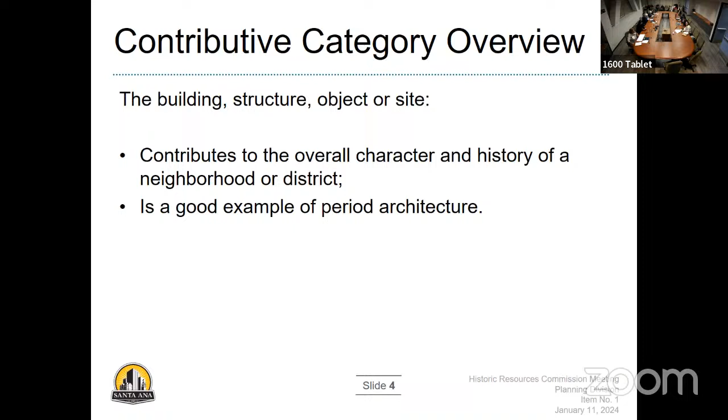And then again, as a refresher, I've included this slide that explains the contributive category overview. So in order to qualify for contributive category, a building, structure, object, or site must contribute to the overall character and history of a neighborhood or district, and or is a good example of period architecture.

And then lastly, staff recommends that the commission adopt a resolution to approve HRCA number 2023-20 and HRC 2023-06, and recommend that the city council authorize HPPA number 2023-12. And that concludes my presentation. Thank you.

Questions from the commission? Yes, Commissioner Christie. Can you hear me now? Am I too far? Not close enough? I'm a little bit closer. Is this okay?

You're okay. Am I okay now? Yes. Okay. Hi, Andrea. Great report. Go back to the pictures. I want to see the first one that you put.

Okay. If you notice on this, I want everyone on the commission to look at the property, look at the landscaping, look at the height of the landscaping. This house is on the corner of Lowell and 9th, 10th, right? On the corner. Okay, when we talk about view corridor, it is where no matter where you walk on the side of the property, going to the front, you can see the entire property, the structure of the historic home, and that none of the landscaping is prohibiting any view of that property from the view corridor.

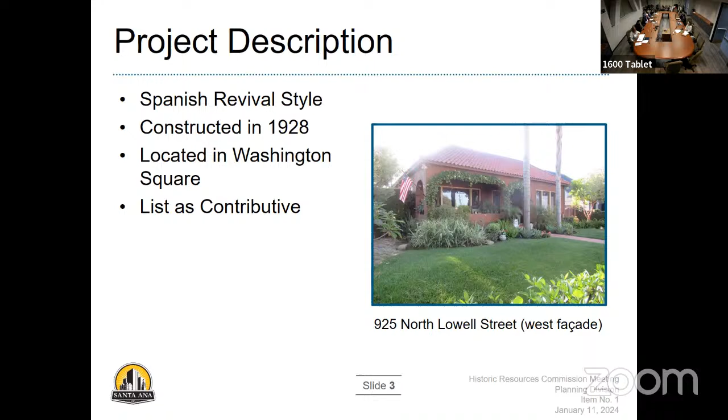In addition, we have an ordinance, and we'll cover that ordinance later on. But I want everyone to show the other pictures, please. As you can see, once again, you can see the full property and the distinguished features of them. So I want the commissioners to keep this vision in mind, and we will discuss further about the view corridor. Okay. Thank you.

Commissioner Christie, you're asking about a view that is not represented in one of these pictures.

Questions of staff, Commissioner Hardy? Yes, I'm curious. I have a question and a comment. Can the garage be seen from the street? Yes. How important is it to keep and maintain the clay tile coping and clay tile roof awning on the garage? The garage was listed as a character defining feature as part of the historic property.

It has been altered. The garage door is not original, and that's mentioned and is part of the Mills Act work plan. But any of the features that tie in with the main house should be preserved or restored, including the clay tile roof awning and coping. Okay, thank you.

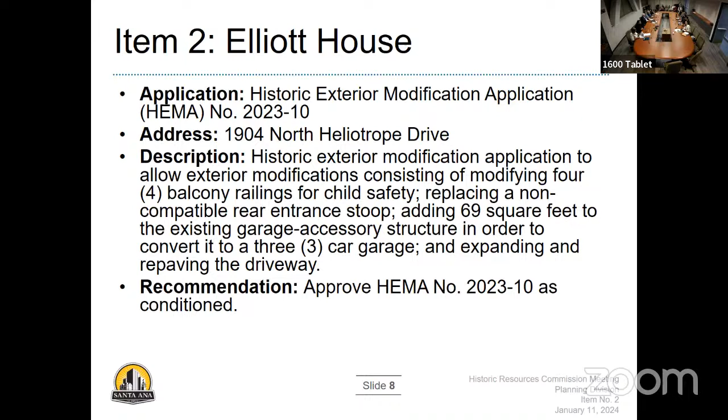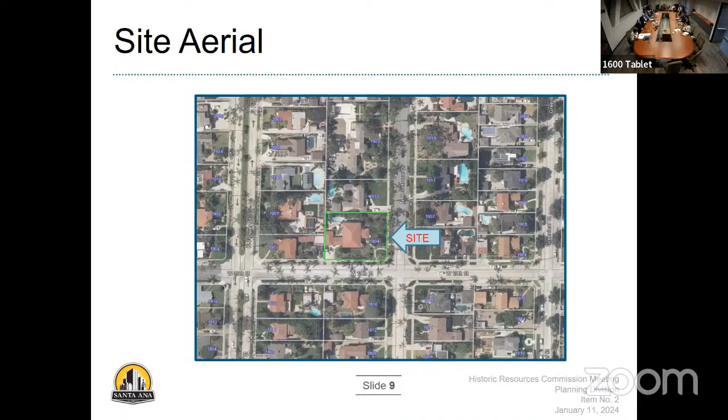The Elliott House was constructed in 1931, along with the detached garage, in the Italian Renaissance Revival style. It's currently listed as number 332 on the Santa Ana Register in 2003 at the landmark level, which is the highest level. And because it is in the Floral Park National Register Historic District, the district is automatically listed in the California Register of Historical Resources. Lastly, the property is a contributor to the Floral Park National Register Historic District.

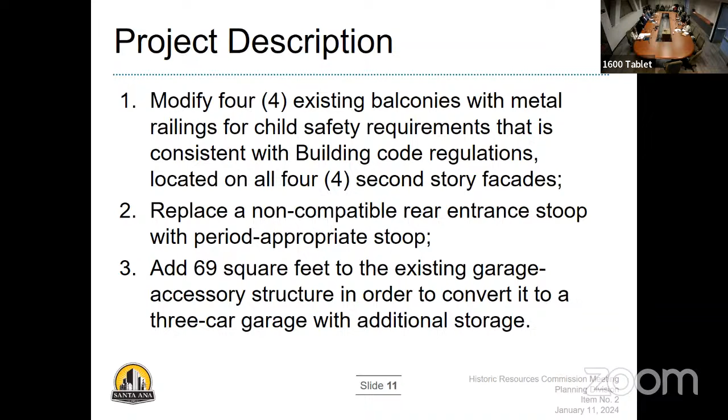The project description includes modifying 4 existing balconies with metal railings for child safety requirements that will be consistent with building code regulation. They're located on all 4 second-story facades. Also, replacing a non-compatible rear entrance stoop with a period appropriate stoop, and adding 69 square feet to the existing garage accessory structure in order to convert it into a 3-car garage with additional storage.

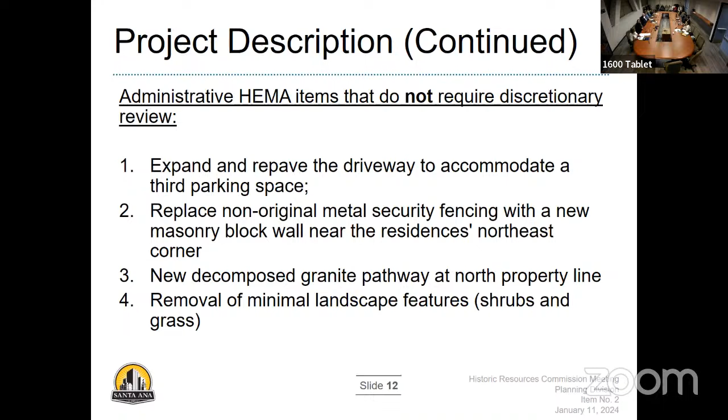Here's a list of the administrative HEMA items that do not require discretionary review, but we still list them so you know what is part of the project: they intend to expand and repave the driveway to accommodate the 3rd new parking space in the garage; replace the non-original metal security fencing with a new masonry block wall near the northeast corner of the property; add a new decomposed granite pathway at the north property line; and lastly, remove minimal landscape features, shrubs and grass in order to accommodate the driveway expansion and the pathway.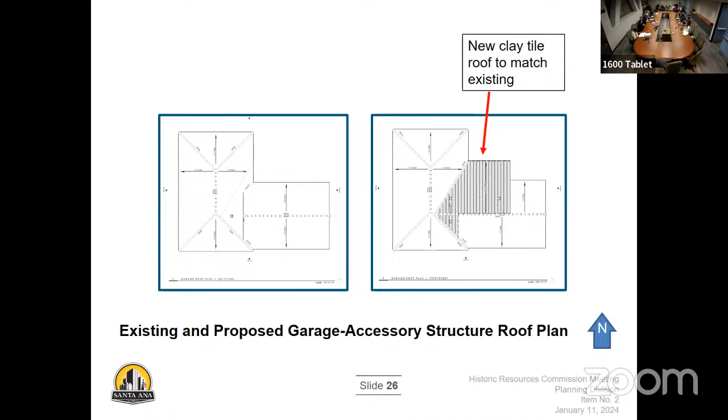So that's number one. Number two, I wanted a little bit more detail. I know one of the other major changes was related to the guardrails themselves. I think what matters with this particular kind of metal work is when you look at the width of the work, very much at the detailed level, I think we're kind of missing that. So I'm not sure, are there going to be any kind of adornments along the base, which are consistently there currently? The base has these small little... oh my gosh, I'm forgetting what they're called, like feet. Yeah, the little feet. But that's there currently.

So I guess I would just try to go ahead and match that or something similar, because if we're getting just the regular kind of rebar, a 1x1 metal tube that is fairly common today, that would be inappropriate to do. Unfortunately custom work probably isn't feasible at this particular moment in time. But if we're matching it to the historic original that we have a good example of, that's something I would take a look at with that proposed change.

And then thirdly, this is really more of a policy question for the board.

Is this a Mills Act property? Okay, so do we know how much the property is currently getting as a tax rate? We don't get that information disclosed.

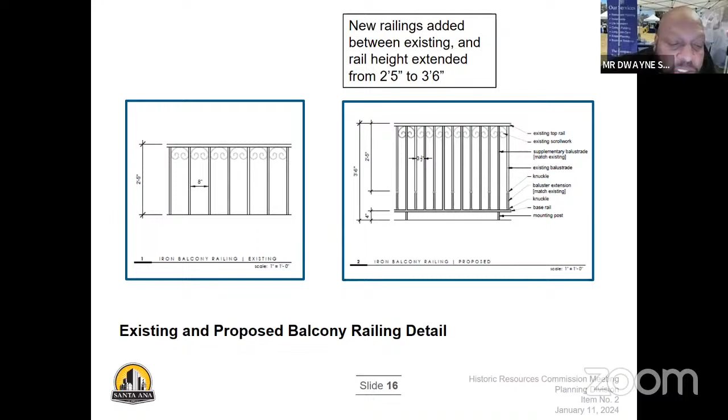And Commissioner Schiff, do you have any questions? No, all the other commissioners pretty much said all the concerns that I had, so I'm in agreement. Okay, I have a couple of questions.

Exterior balconies which are not being addressed. There is one that they are not modifying. It's made out of wood, the balustrades are wood, and it's decorative. It's not meant to be stood on. I see. And there's a door that opens to that balcony, and they're going to make it permanently fixed for safety. I see. So, okay, okay.

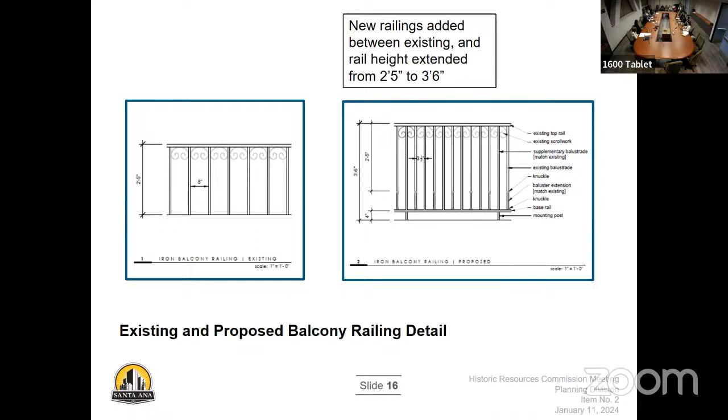I don't know the exact details. We can ask the architect, but I think it's just a simple wall. It's supposed to just blend in and not be noticeable. Well, it would seem like it would need to be stuccoed and then have some landscape product grow over it, so it goes away, I would think. I mean, maybe we're picking the fly specks out of the pepper, but that's what we're here to do.

You like that, huh? Commissioner Christie?

Also, the garage is to be a three-car garage. And when I look at how, is it an optical illusion that the door, it's gonna be what, a one car and a two car doors, there'll be two doors, is that it? Yes, two doors. The existing door accommodates two parking spots and the new door is one. Okay, all right, okay. That concludes my questions.

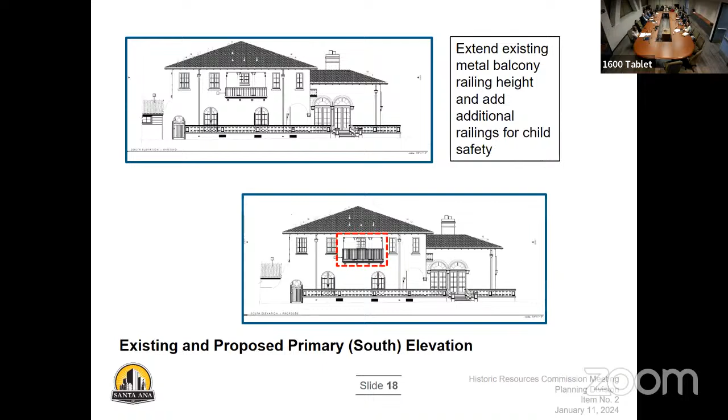In terms of the garage, it's a curious building. If we could go back to that front facade - the garage was built at the same time as the house, which is nearest the rear property line. Then there is a building permit with dimensions for additions to the house. However, it's really an addition to the garage, but there is no addition to the house, and the dimensions are the same as this building added to the garage. So we have to presume that that was that permit.

What you see in the upper left image there is actually the old garden wall that connected the house to that original garage. Part of it is obscured because it currently goes inside the building. The building right now rests on top of that garden wall. It's from the 40s - I guess this is the way things were permitted.

The left gable, the left end of that addition, also sits on the rafter tails of the original garage - that is the support, there is no wall underneath it. So it's a leaking problem, but it's also that there's no structure underneath it to speak of. So the new garage will place that wall behind the garden wall so that it can be retained. This Baroque scroll from the house down to the garden wall will now be exposed again.

The existing shed is clad in horizontal wood siding. It very much takes on more of a ranch character, which we start to see appearing from the 40s through the 50s, so it was contemporary with the trend at that time. The rear stoop also has flagstone, which again is part of this 1940s work. The pool was actually put in during the 50s, so those are later modifications. We're treating this as a non-contributing part of the property.

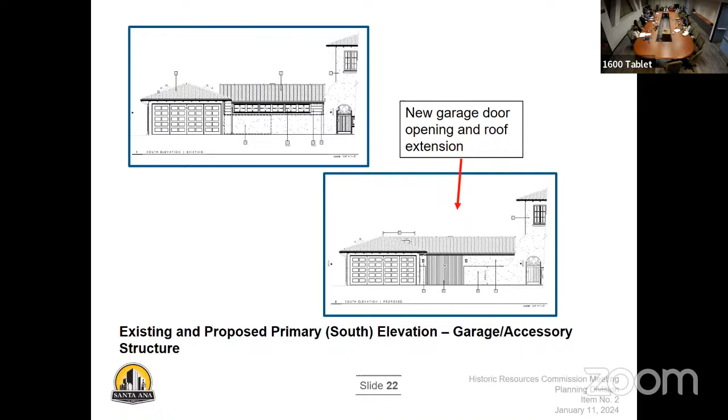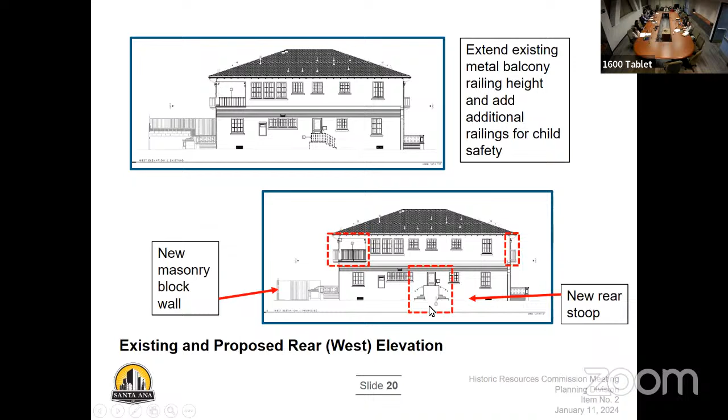That's the proposed finish style. We have two gates proposed as part of this project - one is out at the street. But nothing existing has a vertical pattern. I believe there is some in the gate. Yeah, so actually where we were just looking, that gate underneath this Baroque scroll kind of design, that actually does have that.

I think that's - were there other questions? What's the address, and what is the masonry block wall going to be covered with? Just a stucco finish to match the remainder of the property, same as the new garage finish. So it's not going to be left as just a block wall, no - it'll have a plain stucco finish.

Okay, and as far as landscaping, it's actually not that visible from the street. If we go to the site plan, keep in mind this is 50 feet back at least from the street - a very generous setback on the front lawn here. There is landscaping in front of it, at that edge of the property. So I'm not going to say it's not visible, but I don't think it will be predominant, because there's plenty of trees and shrubs to mask it.

Yeah, I did, just out of curiosity, want to share with you - I have something put together a number of years ago on this property. I wanted to show you the original garden design. The applicants have no problem maintaining that hedge at that height, but I did want to show you the historic garden that was originally planted for this. The garden that's there today is much, much more restrained than what the original design included.

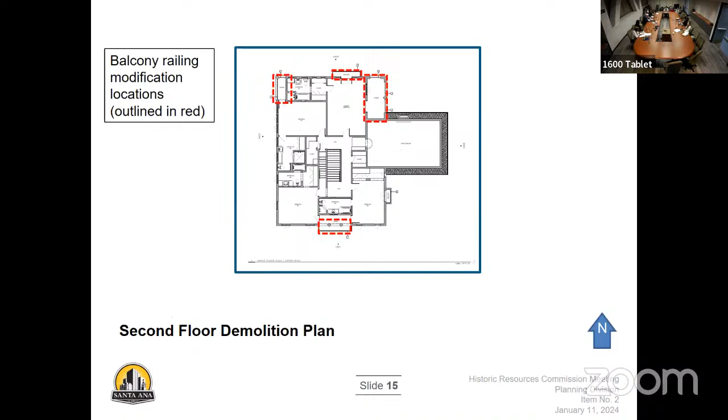That wall will go away and be rebuilt. Right now it's a block wall that's just painted, using fluted blocks popular mid-century, likely part of the 1950s pool changes to the property. Currently it's partial stucco and partial paint, not the most attractive part of the property. Security bars have also been added that they're trying to clean up. It's probably the weak part of the property right now, but they still want to maintain some sense of security, and since there's a pool, there has to be a 6-foot high fence.

Right, it was just that small section. It was a nice addition and revision, so just appreciating that.